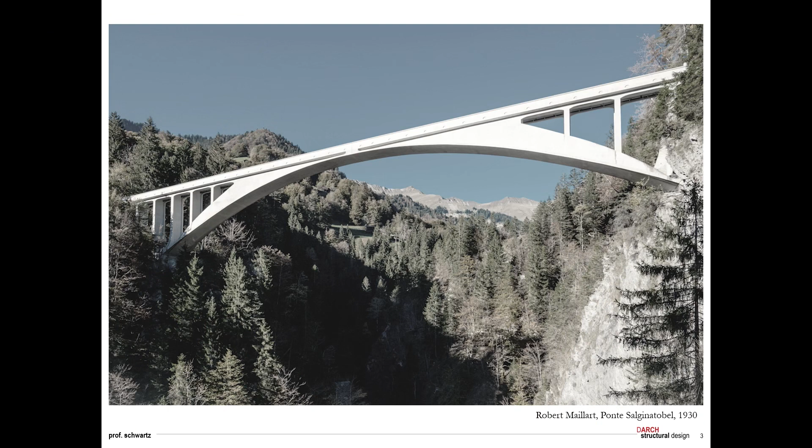If you look at this very well-known bridge of Robert Maillart, the Salginatobel Bridge, built 100 years ago, for sure Robert Maillart was not only looking at the classical ways of developing bridges. There is the quote that he was pre-designing bridges on old, already used letter envelopes, and I think this can be very nicely explained, probably you know this, by the fact that he was using graphic statics.

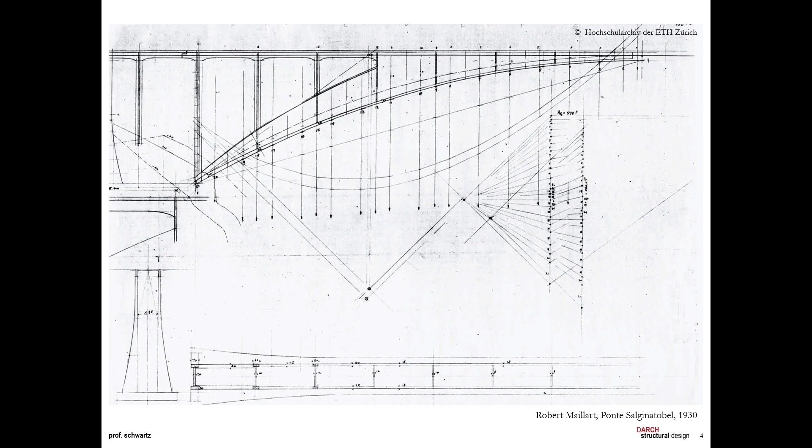And the reason is that he looked at the compression line in this arch, and if you have loads on the one side of the bridge, this line will go up, and if you have loads on the other side of the bridge, this line will go down. And the intention was to have this line at the interior of the material.

As long as you have the line at the interior of the material, there is bending. For sure there is bending, but this bending can be taken only by compression, and so you don't use a lot of reinforcement. That means he started with a very strong idea how the form should be developed in order to have a very efficient load-bearing behavior.

And what civil engineers are normally doing, they are waiting till the architect brings a system, a structure, and then they are trying to put a system, an engineering system in. They are making this structural analysis, and then the answer is it works, or very often it is not working. And then there is an iterative process, and at the end nobody knows where this iterative process will end and what about the efficiency of the project.

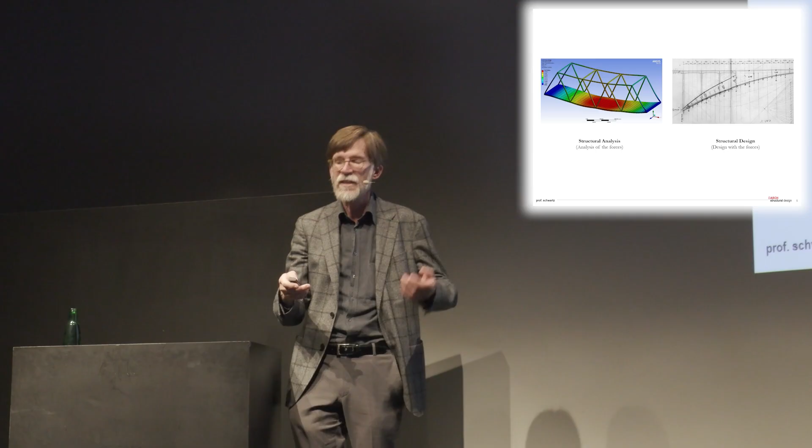And perhaps it's interesting, this question, does something work, was never asked between Christian Kerez and me. Never. The question was always, if we are doing this, what will be the consequences? And everything works, but the consequences can be heavy, and they can even be a no-go. But if we are speaking about the consequences, then we are able also to go on developing the structure.

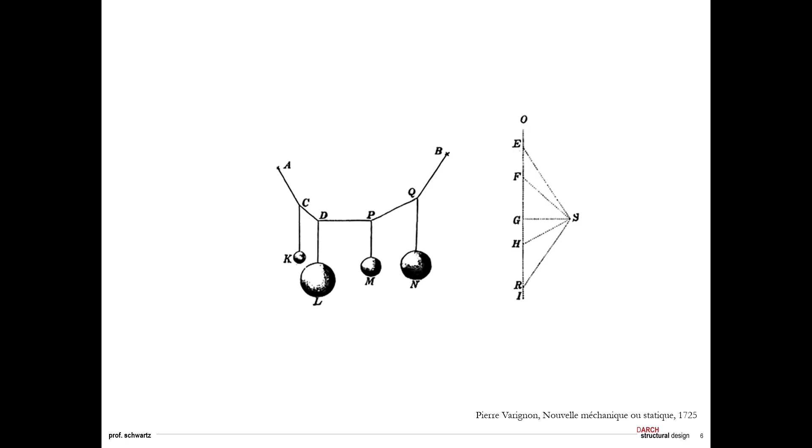And our model for articulating forces in space is fully based on graphic statics, a very old method that was already developed 300 years ago. As you see here, then Culmann in Switzerland, at ETH Zurich professor, was strongly pushing this method. And we tried, together with Aurelio Muttoni in Lausanne, to push this method in a way that we are able to model all possible systems by the internal forces.

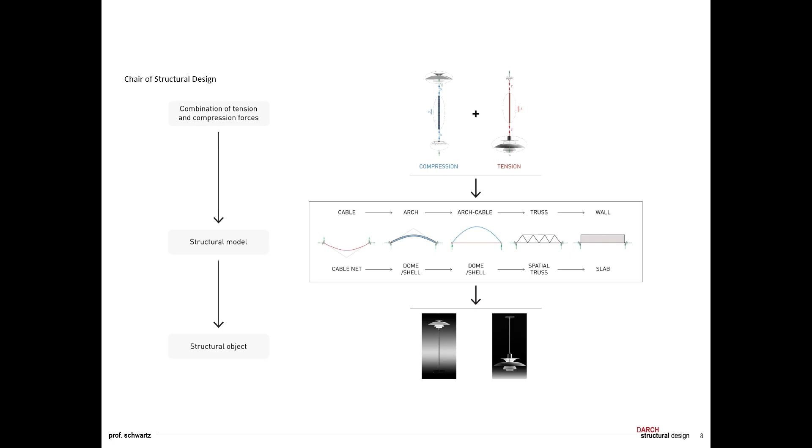Because, as I already mentioned, we are trying to start, as you see it on the top of this slide, with the internal forces, then trying to speak perhaps about how to articulate these internal forces, and then coming to the structure. And in order to do this, we developed a very strong methodology, starting, you see it here, with the cable going to the arch, then combining both cable and arch, then making a superposition of these arch cable systems, and so we come to the truss, and then at the end we are blowing up the struts of the truss, and we are coming to the beam.

And we are not starting, as civil engineers are often doing, with this beam, with slender lines, the statics with this classical statics, where already the most important dimension in this direction is missing, not speaking about the dimension in the third direction. Here you see once more this principle, and what we are doing, we are trying to explain, to teach this to architectural students in the first year course.

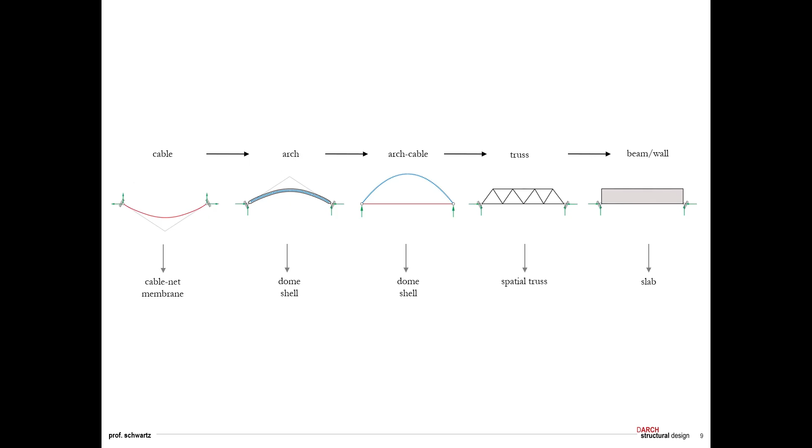That means cables, arch cable, truss, beam, and then at the same time going in the third direction. Cable net, dome shell, spatial truss, slab. That means at the end, they are able to go with graphic statics. I will quickly show how this works. And they are able to understand and even to articulate and even to calculate such systems. And all of them have the same level of complexity.

For civil engineers, shells are something very, very complicated, and you need computers. I don't know what. But for looking in this way at things, a shell is as simple as a beam or as a cable, and all these different systems have the same level of complexity. That means it's then also very easy for the students to use these different systems in a very playful way.

And I will also show that at the end the aim is to leave these typologies and no longer speaking about cables or shells, but only speaking about forces in space, and bringing these forces in equilibrium, and bringing these forces in relation to materials, bringing them in relation to structure in the sense also of architecture.

Simple principle leads to diverse structural behaviors. That's very important. Teaching, I already tried to mention what we are doing. We have then a second year course. We are going more in the direction of materials, and at the end, master studies, we have a lot of special lectures where they can play theoretically or experimentally or whatever with this methodology.

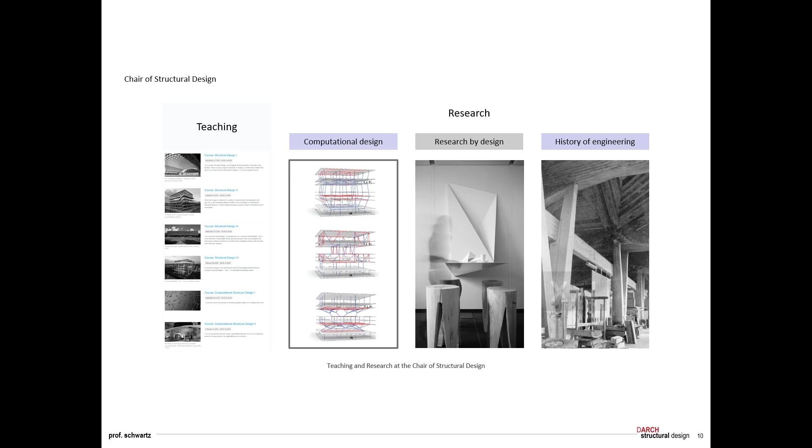In research, we were strongly doing research in direction of computational design, then research by design, and also history of engineering was a very important topic for us, because a lot of things in civil engineering history are forgotten and can be in a very nice way reflected also today, to be able to be much more efficient in developing such structures.

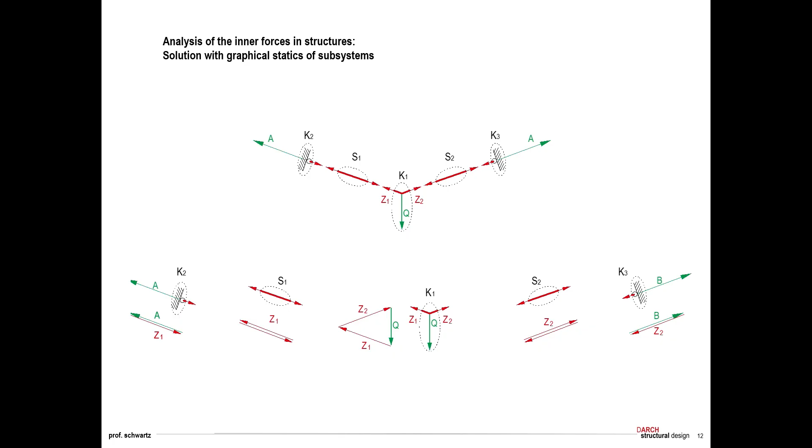Very shortly, this is something you understand. A man standing on this cable, and looking at this with graphic statics is easy. You only have to make equilibrium, for instance, in this node, and then at the end you will have something like a force triangle. You can put these force triangles for the different nodes together. Then you are coming to the force plan. You see it here on the right-hand side, this force plan and Cremona plan.

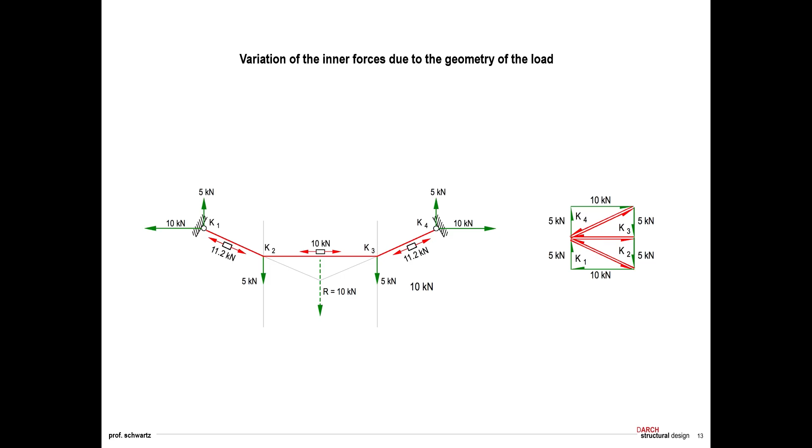And what's very interesting, if you are changing geometry of the system, immediately also the force plan changes, and you can immediately understand how you have to articulate your system in order to also be able to articulate the forces. That means you are not going by trial and error, but from the very beginning, you immediately see in the way of parametric thinking what happens if you are changing geometry. And this is also very important for architectural space, because proportions and all these things are governing elements in the concept phase.

You see here, playful with the students, we tried to also physically understand how forces work, and a very nice example here, the pavilion of Siza in Lisbon shows also in a very strong way how the method works. You don't only have this red line, red means tension in this tensile membrane, but we see also how the forces are going down in the towers. This blue line is leaving the tower. Then you need stirrups to put it back. You see how then the force interplay is going on.

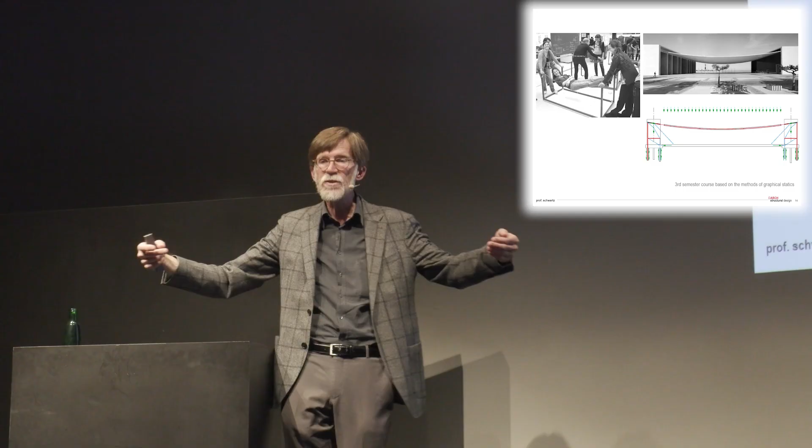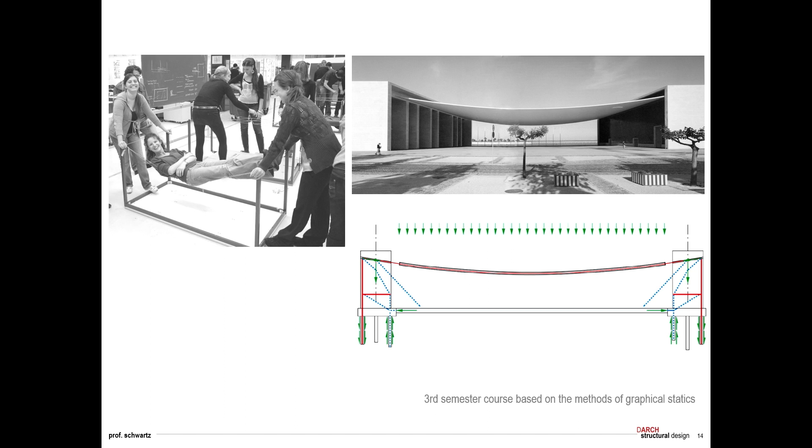You see how these forces are going in the ground with these piles, and you see also that you need this horizontal slab on the bottom to close the overall system in a very simple way, and you can immediately understand if you are changing geometry what will happen with the forces, and so it's much easier to articulate the whole system. We are not speaking about bending, we are speaking about this arch cable system, as you see here. Easily to understand. This can be an internal or an external system.

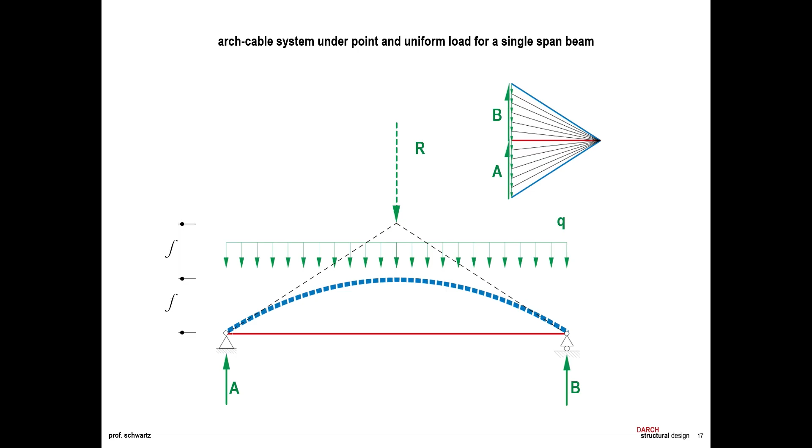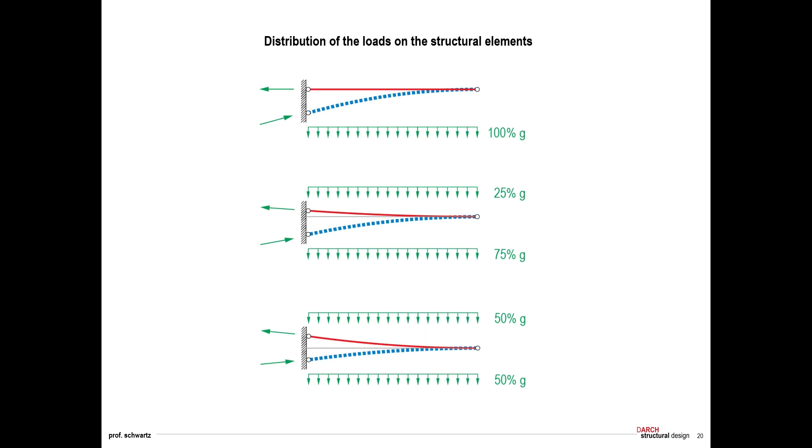Also here you see on the one hand the force plan, and on the other hand you see the system itself. Then you can do the same thing for cantilevering elements as it is used here. You can change geometry from the point of view of curvature of the compression element and the tensile element, and you can play also with the rise, and so you have all the parameters from the very beginning under control. You need to develop such a system that is really corresponding to a form that is efficient also in the sense of statics.

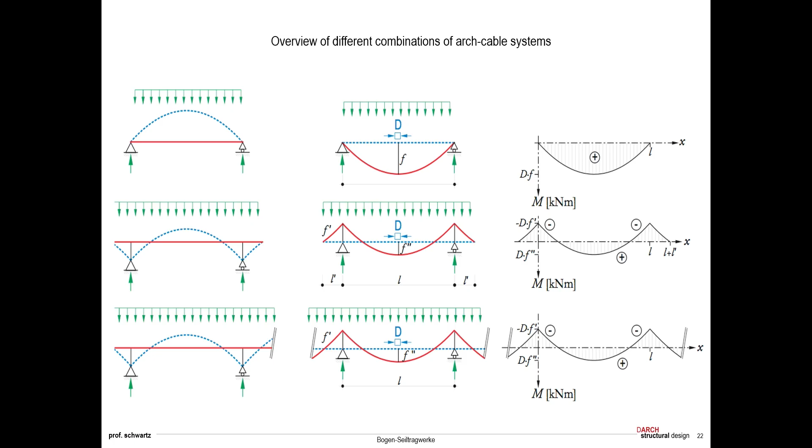Eiffel Tower is a nice example. This was already done by Maurice Koechlin in the same way, also with graphic statics. He developed the form, or you see here beams, or also beams with cantilevers or continuous beams. And what we are developing there is very similar to the representation of bending moments, but bending moments are something very abstract and never showing something about geometry, and never showing something directly about the internal forces. It's bending. We don't like bending, shear, torsion and confusion. We like much more compression and tension, and are trying to reduce everything to these elements.

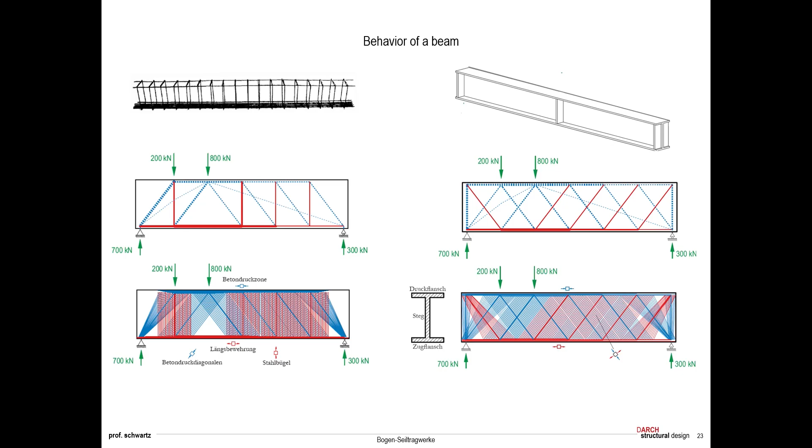You can also do this with stress fields in the sense of theory of plasticity, lower bound theorem of theory of plasticity. Left-hand side a concrete beam, right-hand side a steel beam. You see you have similar trusses at the inside, you have similar stress fields, but they are related to the material. But the principle is the same, independently if you're going with timber, with concrete, with reinforced concrete, with pre-stressed concrete, with steel, with synthetic materials. The principle is always the same. We already developed a book in 1996 together with Aurelio Muttoni and Bruno Thürlimann, who was my PhD supervisor, on stress fields in reinforced concrete.

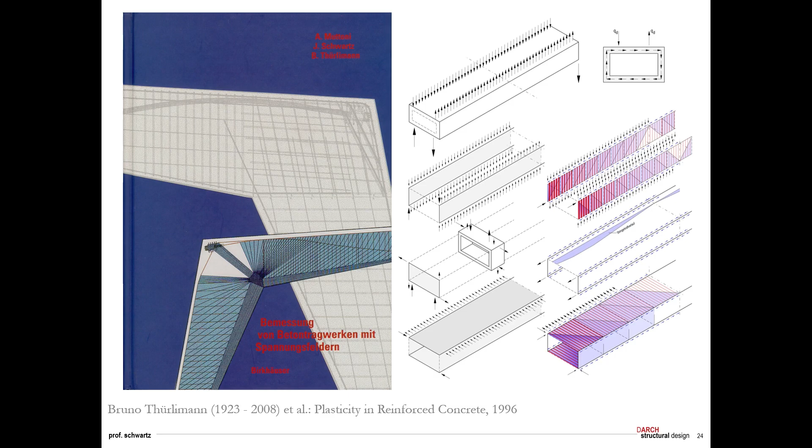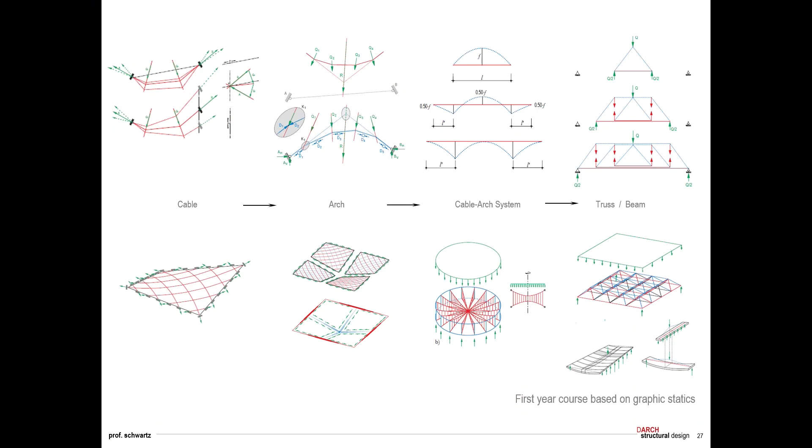And the whole thing, as I already mentioned shortly, is based on the lower bound theorem of theory of plasticity. We are not doing something that is approximative. These are systems based on a very strong theoretical background, because we always have equilibrium, and that's the very most important aspect, and that's not always the case for a lot of works that are produced in a lot of civil engineering projects. Continuous force flow in space, that's very important.

Also the third direction, and I wanted quickly to show this in order to make it perhaps a little bit easier understandable when I will now speak about these selected projects, and also a little bit about the development of the projects. I think this is much more interesting than showing the final project. Some of the projects you will know, but what you will probably not know are a lot of anecdotes during the developing process, and I think these are not anecdotes, but this is how projects are developed.

And for all of these projects, what's nice at the end, it's no longer possible to differentiate what was brought in by the architect and what was brought in from the civil engineer. I think this is very nice, that at the end you can no longer split this, and we don't even remember how this process was really running. We only remember a lot of anecdotes, but there is no continuity in the development for sure. You know this very well, projects you have developed by yourself.

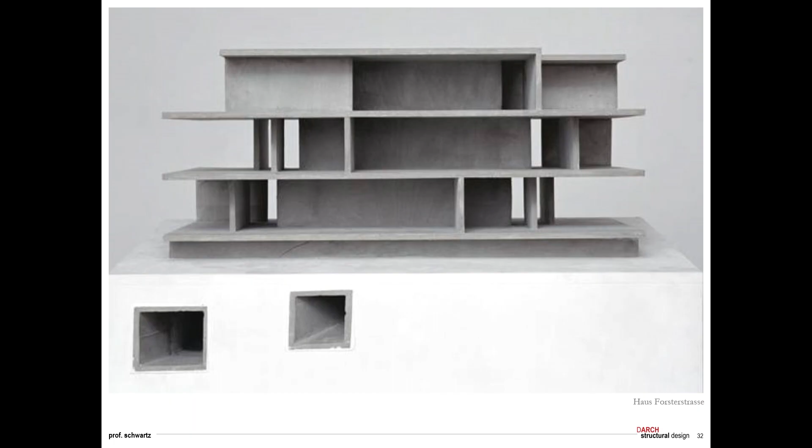And then for me it was sure that in order to produce something like this, the idea behind must be very, very simple. If the idea is not very simple from the point of view of civil engineering structural design, then we will immediately lose control. And then what we did at the end, we developed a rule that a wall has to be supported at least at one point. This seems perhaps a little bit strange. If you are telling somebody you have a wall, you put it on one point, and the point must be in the middle. But no, this was for me not the point. It can also be supported by this point.

Why? For sure, because this wall is not alone. This wall has colleagues in the building. It has a slab on the top, it has a slab on the bottom. And now, in order to rotate around this point, it has to be detached from the 2 slabs. That means the forces, tensile force here and the compression force here, are enabling this wall to stand even if it's only supported by one point, because it's at the interior of this integral system.

But that means that on the other side somewhere there must be a counterbalancing wall, and you see very nicely these 2 walls. On the one hand you have this one, which for sure is only supported on this point, and then on the right hand side you have another wall, and this wall is only supported on one point. And so it's possible, by looking at this integrally in 3 dimensions, that you will be able, if everything is in equilibrium, to bring at the end these forces down through the middle core of the building.

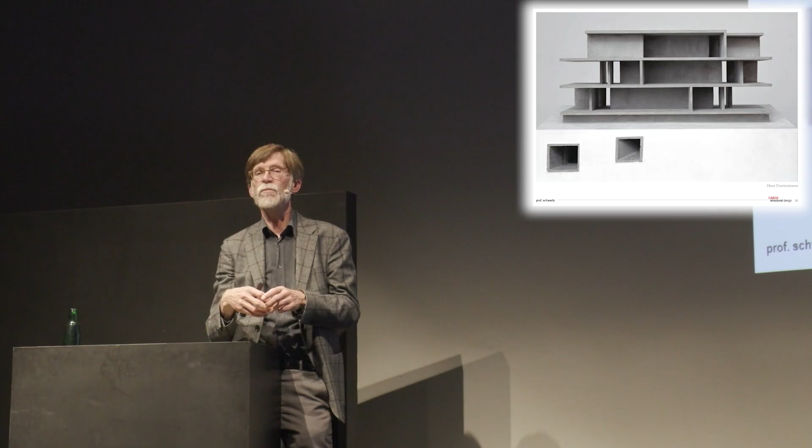What was the benefit? We had a very, very small plot, very small dimensions to build the building, and it was very important to build spaces that seemed to be bigger than they are in reality. And for this it was very important to build spaces where you don't see the columns.

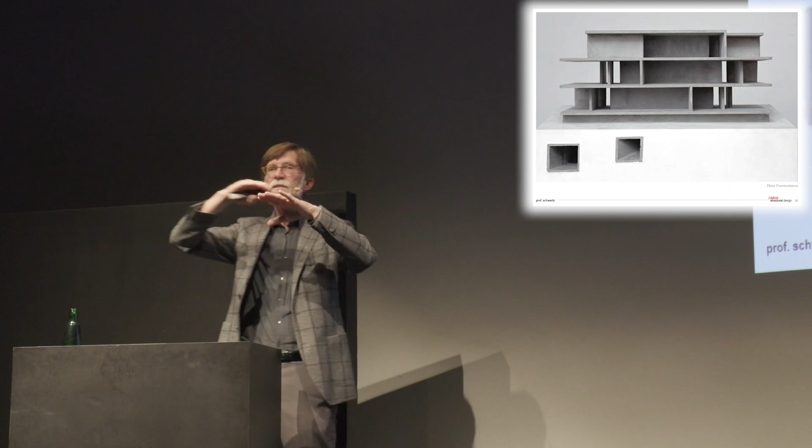Coming back to this example, if you are looking, for instance, here, this slab at this point is hanging on the wall on the top. And if you are in this room, you cannot understand how this span or this cantilevering is possible if you don't know that the slab is hanging on a wall 1 story higher than you are standing. On the other hand, also the total opening to the outside and bringing a landscape in for sure is also increasing this effect of giving the feeling that spaces are bigger than they are in reality.

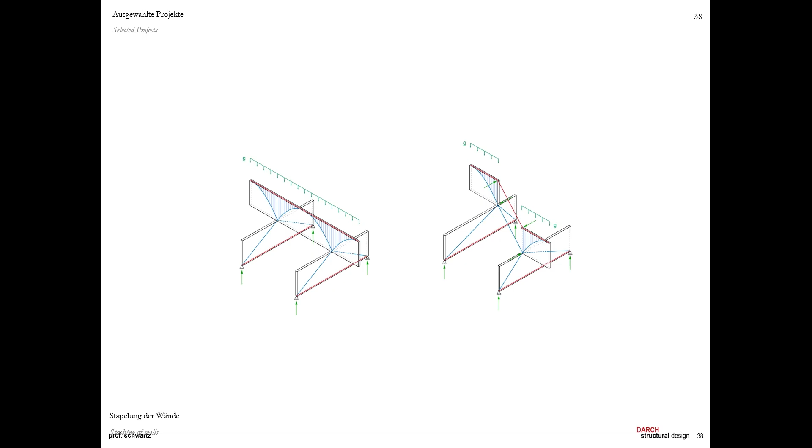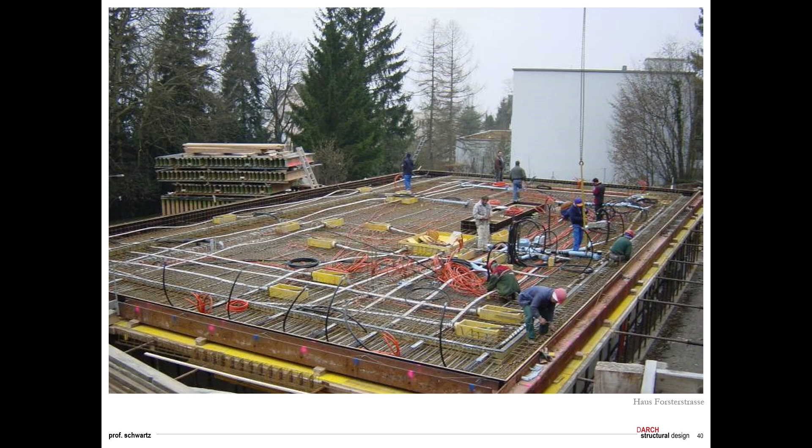For the slabs, we used pre-stressing, very sophisticated, in order to have this very nice concrete surface on the bottom of the slabs. We also like a little bit more complicated handling on site, and this worked very well in the sense of construction. The parking under this slab you see in the slide is without any columns, because we have these 4 walls that are used a little bit like a windmill, and by putting pre-stressing cables in, the deviation forces are replacing these columns, and so it was possible to build this 25 to 15 meters slab, this whole building without any column in the parking garage.

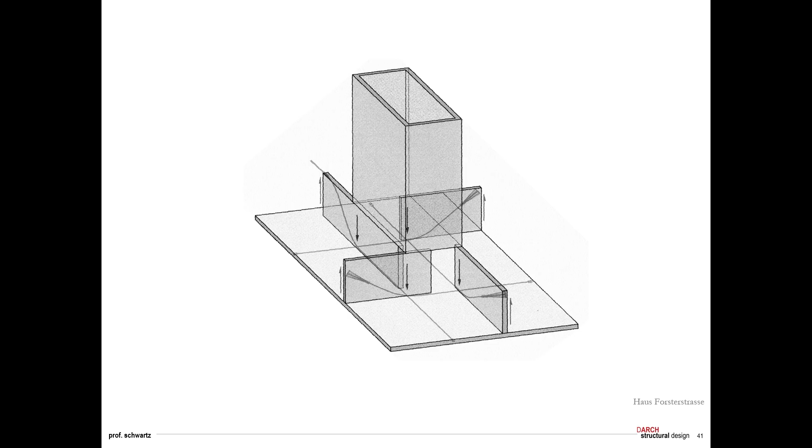Then the Leutschenbach School, you know it very well. Also here some ideas only. This was the first phase, because the competition was in 2 phases. In the first phase there were 2 teams that could work on it. In the first phase we had a system without balconies.

Then in the second phase we put these balconies in. They are very important for fire escape, so that it was possible to have very big interior spaces and to open everything at the inside by making the escape via these balconies.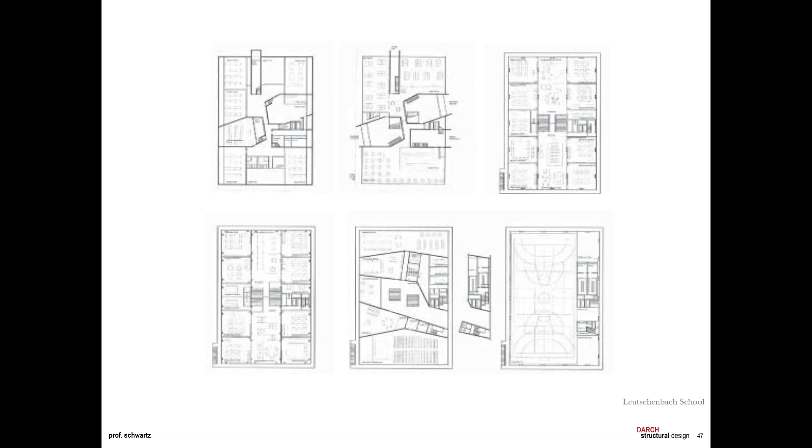And only then in the last phase of the competition, we changed to a total system with steel trusses for the overall load-bearing structure. It's a mixed structure with concrete slabs, but all the wall elements as trusses.

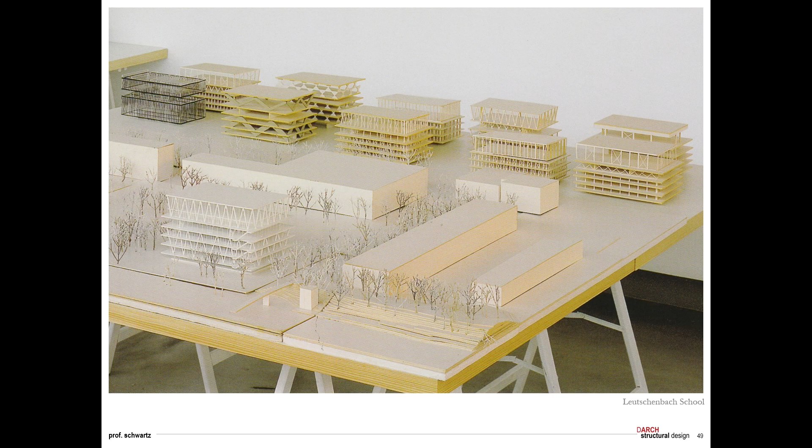And here you see models of different options we tried to develop in the sense of statics, in the sense of architecture, and we were in a very playful way trying to find out what could be the optimum in the sense of structure and also in the sense of architecture. And then, yes, the process went on.

Here you see something that is already very close to the final version, but you see on the ground floor we have truss walls, and then there was the question, are these truss walls really needed? And what could be the minimum? What are the consequences if we are trying to reduce these trusses as much as possible? And the answer was, from our side, the consequences are that it's even better.

And so we went one step further and put the whole building on 6 tripods. And also here, the reason is rather easy. You have all the loads on these tripods. If you now have horizontal loads, for instance, earthquake loads, then you have the whole vertical forces going through these tripods. And if you are bringing these lateral forces, they will stay in the tripods. On the one side they will be increased, on the other side they will be decreased.

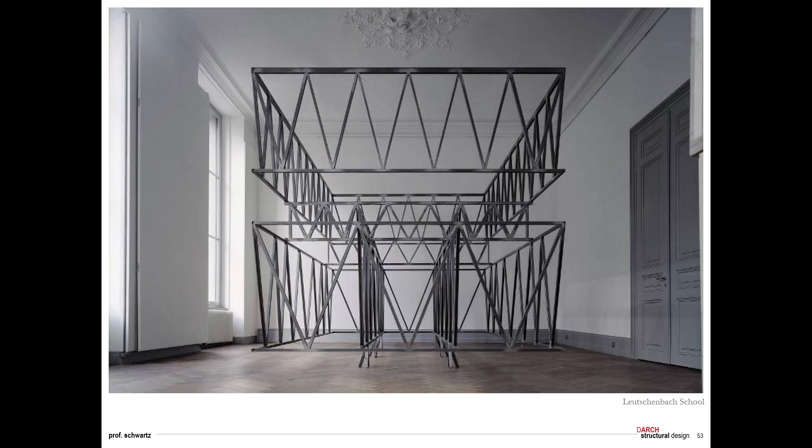Here you see a model we built 1 to 10 for a big exposition once of this steel structure. On the top we have the gymnastic hall only lying on 4 points. Then we have these 2 transverse trusses, and these 2 transverse trusses are bringing the forces down through these middle trusses to the tripods, and the outer facades of the 3 stories of the school building are also hanging on these transverse girders here on the 4th floor of the building.

The open floors on the ground floor and this 4th floor are more public: aula, library, mensa, and so on. And the middle tracts are more private, 3 levels of classrooms in the lower box, and as I already mentioned, the gymnastic hall on the top box.

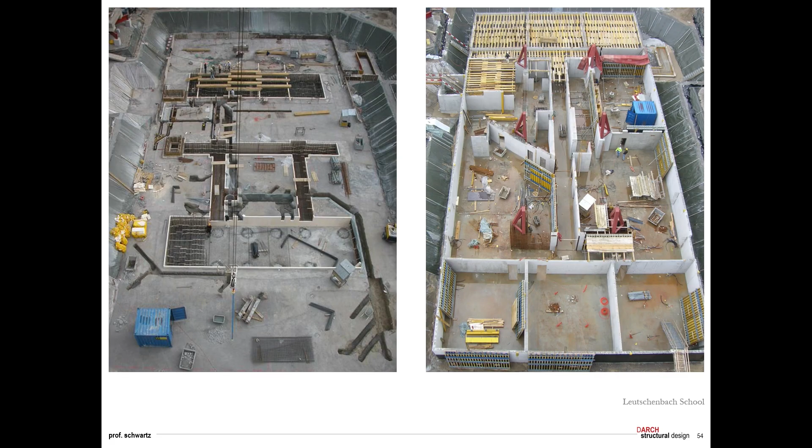And also here, for sure, when we put these trusses at the outside, we had a lot of problems with building physics we had to solve, and we solved this by a most efficient and very simple detailing we developed by ourselves, but I think this would lead much too far to explain all these details here.

You see a little bit the building process, foundation, then you see the situation when we built tripods on the right-hand side. Here you see how we assembled these main trusses, these two transverse trusses having to take enormous loads, and then at the end some plans of the whole system.

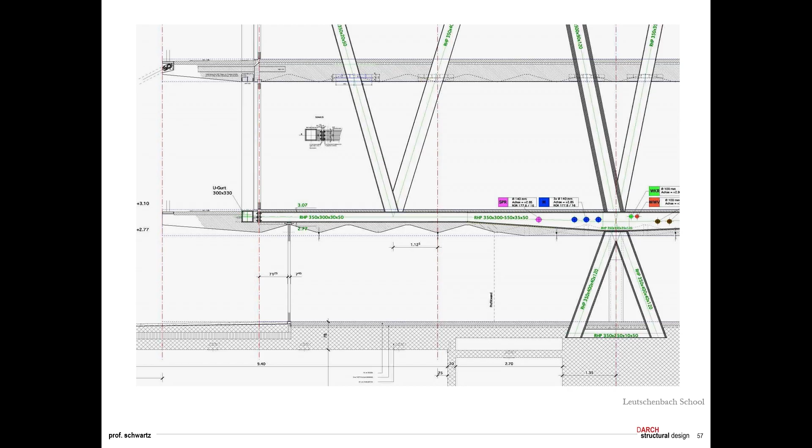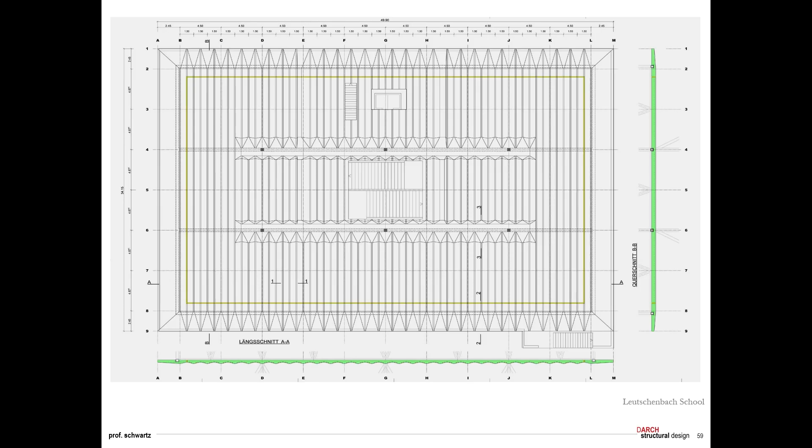You see also this detailing with this very big cantilevering element there, only understandable also here. Same principle as for the house in Forsterstrasse, if you understand that the slab is at the end hanging on this truss. For the planning, it was a lot of work to do in order to have all these openings at the right location from the very beginning, and so on and so on. You can imagine what this means, a lot of detailed planning was necessary, but at the end the process on site was not so difficult.

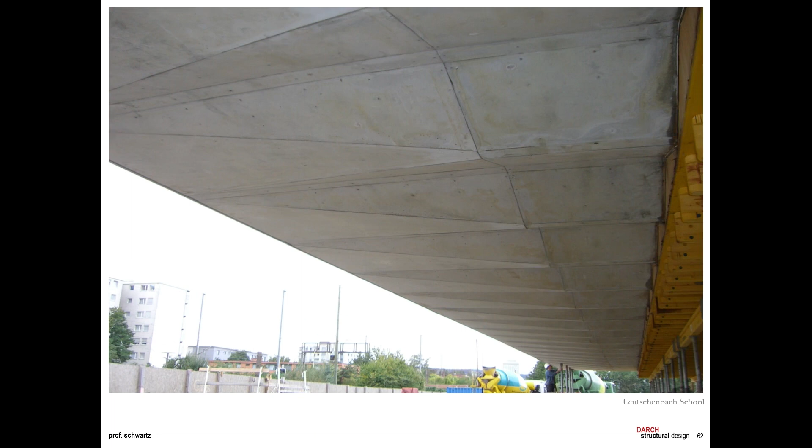The slabs also here, formwork of the slabs, then you see how this was developed. You see then when scaffolding was taken away, this is always a very difficult moment for the civil engineer, but at the end we were very happy to be able to bring this building to a good end. This is the edge of a classroom.

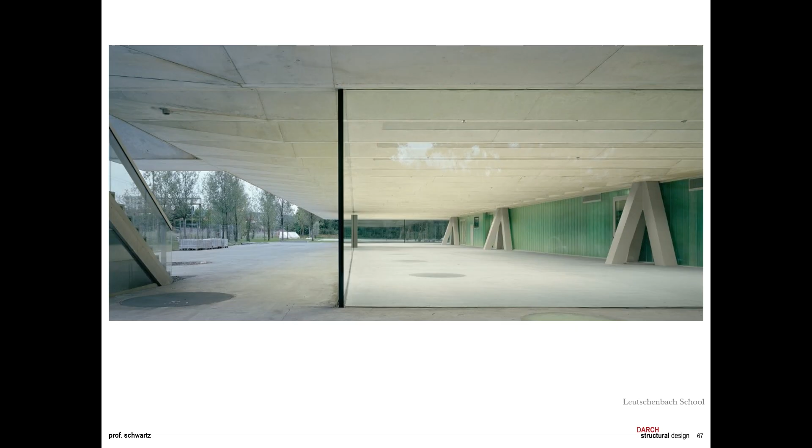And here also you see this very strong cantilevering of 13 meters on the bottom, and these bases are very strong, and it was also here possible to put glass in without any frames. This needed a reduction of the height of the building, and this was also fitting to the architectural idea of connecting outside and inside, but also to making this very high load of the building, this flying load, a little bit more dramatic.

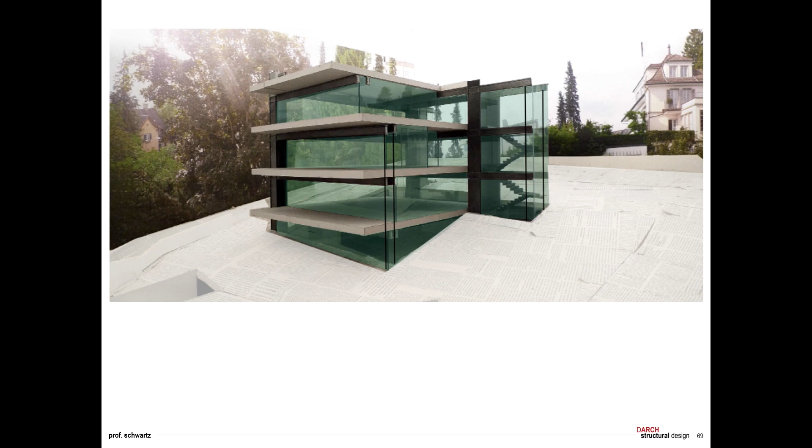House with the missing column, it's a Haus Müller. It's a Haus Müller in Zurich, not a Haus Müller in Prague, but nevertheless, it's also an interesting structure, but not comparable to the school of Leutschenbach. You see, it's a building with 3 levels of flats, only 3 flats in the building itself.

And the idea was to go with a windmill-like system, starting with 3 cores. One core is here, then another core is on this side here, you see it with the elevator, and the last core is on the bottom here with installation tubes. Staircase core, core with the elevator, and the core with the tubes. And then we have these cantilevering elements going out from this core, and they are connected. Only the last one is lost. For the last one there is no connection at all.

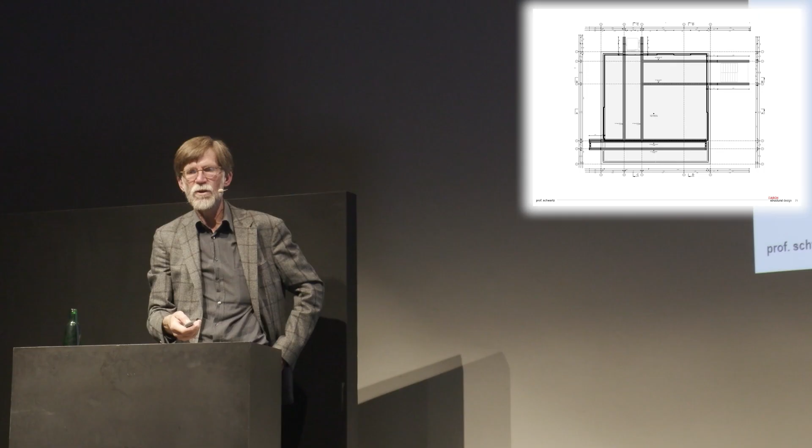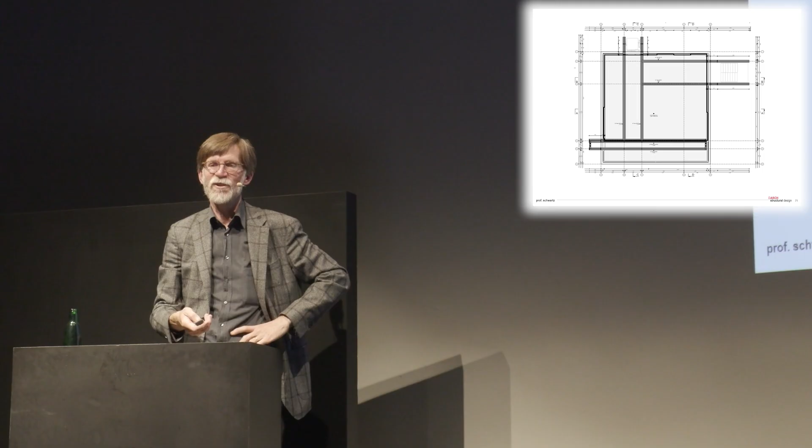And in order to bring this one under control, we built it a little bit like a curved element, like a banana, and then with cables we brought it into the horizontal position during the building process, and so it was possible to use these cables as columns in the further process, because the reduction of a tensile force in the cable is the same as the increase of a compression force in a compression column. This is perhaps a little bit tricky, but that was the way we solved it.

And then you see also here, this is also a mixed structure. This was an interesting building phase with this structure in space without any reference element. It was not so easy for the contractor to build, but he did it very well. And then in the second phase, the slabs were put in.

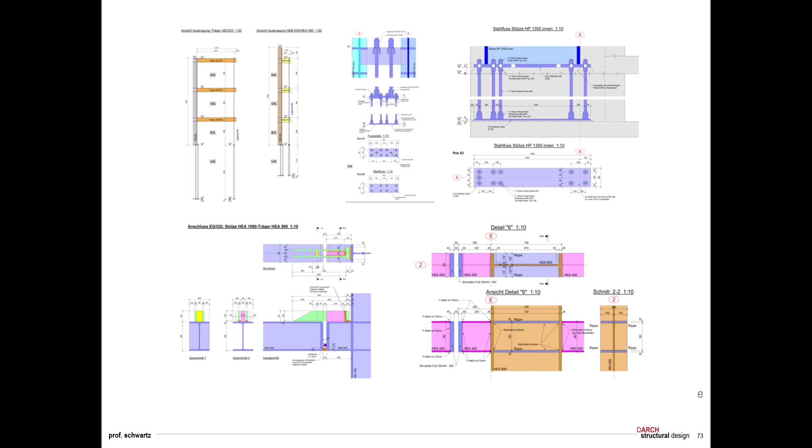Here we had a lot of problems with these connections, where we also had requirements on fire resistance, and all these details we tried to develop by ourselves, and then at the end to test them also in a laboratory. But also this leads much too far to explain it here in detail.

Now some projects that are a little bit more recent. Incidental space for the Biennale in Venice. That was more a question of how to develop spaces that are a little bit strange, a little bit new, a little bit playing with the perception of spaces. And the next project I will show goes in a similar direction, but it's something totally different. But the idea is more or less the same.

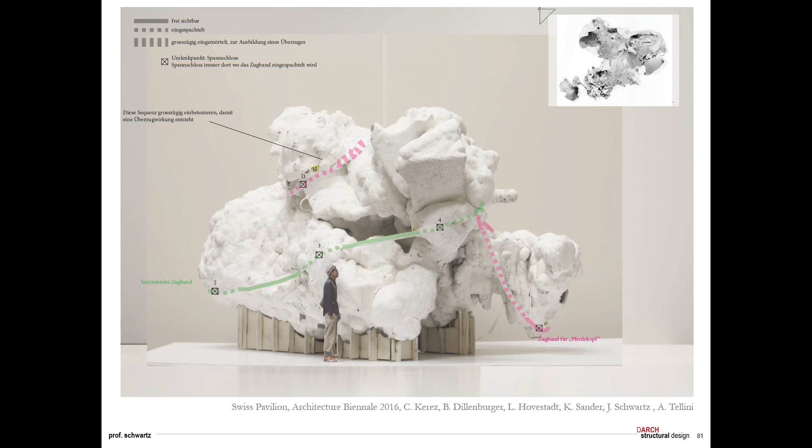And then the question was how to build it. What could be the thickness of such a structure? My answer was something around 3 centimeters. Okay, then let's choose 4 centimeters on the bottom part, 2 centimeters in the top as the thickness of this shell-like structure, and let's try to build it. And then we found a shotcrete specialist who was able to help us to build it.

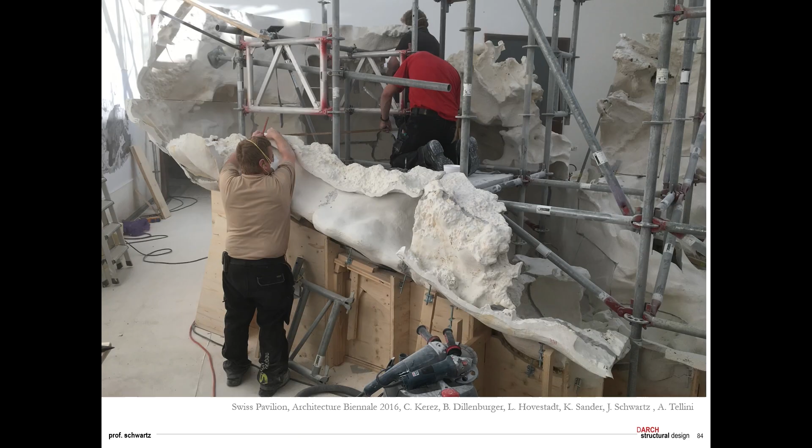And then at the end a shotcrete layer between 2 and 4 centimeters was put on it, and at the end all these different elements were transported to Venice, more or less 200 elements, and then they were assembled on site in the Swiss pavilion, as you see here,

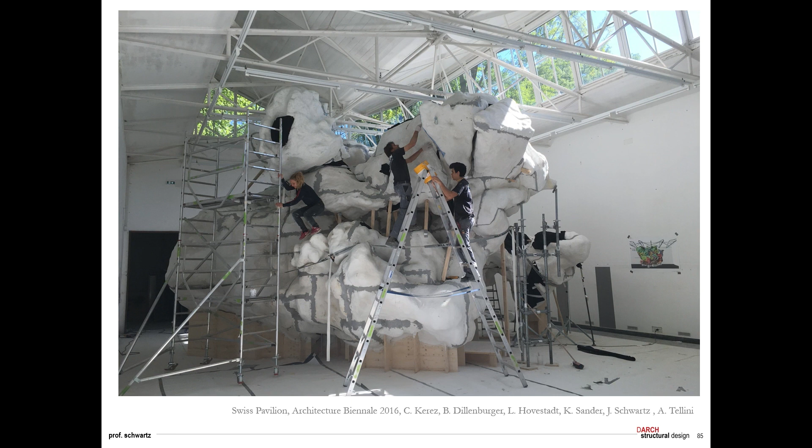and they were glued by an epoxy glue. Here you see a lot of people, students, building this 5-meter high building, and at the end we had to put this entrance in so that it was possible to enter. And here you see some cosmetics at the end. This was during the inauguration of the exposition.

Christian Kerez together with the Swiss minister, and they were sitting inside and were trying to understand what was going on in their perception by being inside this structure. Here a last picture from the outside, and the entrance is somewhere here. That means you can imagine a little bit the proportions as we have seen before, 5 meters high and 7 meters of length. So far for this project.

Now I'm coming to the pavilion for the Kingdom of Bahrain for Expo 2020 in Dubai. And as I already mentioned, the idea behind it is more or less the same, but the product is for sure totally different. But it's also about perception of space. And you see here first pictures of these buildings. This is a floor plan, 25 by 25 meters.

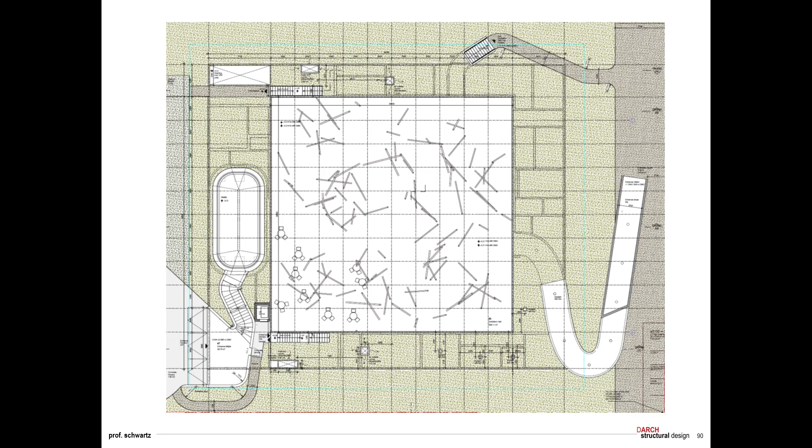We are more or less in the dimension of the school building of Leutschenbach. And here you see the rooms that are placed around, everything underground, and what is visible on the outside is only this cube. And not to forget, on the left-hand side, a small building for the King of Bahrain. He had special possibilities to enter the exposition, but the main building is this cube coming out of the ground, and nevertheless 3 or 4 meters also underground.

And this was what Christian Kerez showed me the first time. He tried to develop it with other engineers because he had the feeling that it's very simple, only one load-bearing element, a column. Multiple of these columns should be easy to manage, but they had problems. They were working on the project for more or less half a year, and the engineers always told him there is a column missing, and then they put an additional column in. And then they found out there is another column missing. And this game went on, and at the end it was not possible to come to a good conclusion.

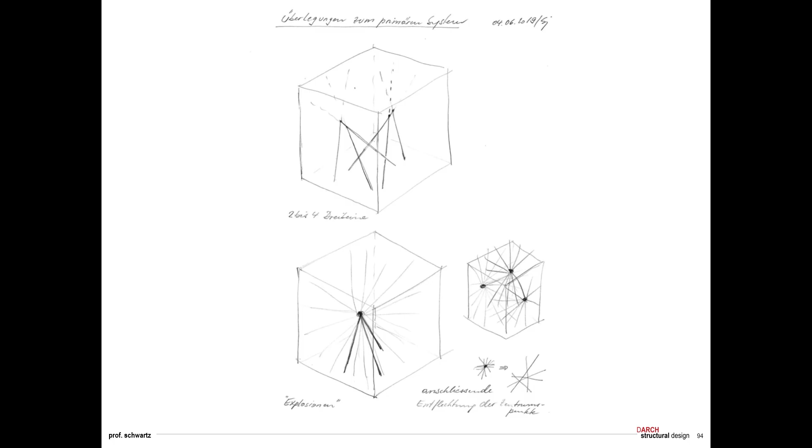And then we are trying to connect 3 or 4 or 5 of these tripods, and then we are looking what happens. We are telling the system, you will not buckle, but at the end we will try to solve the buckling problem; we will eliminate the buckling problem ideally, and then we are looking what's the minimal dimension for these columns, because that was also a very big topic for the engineers.

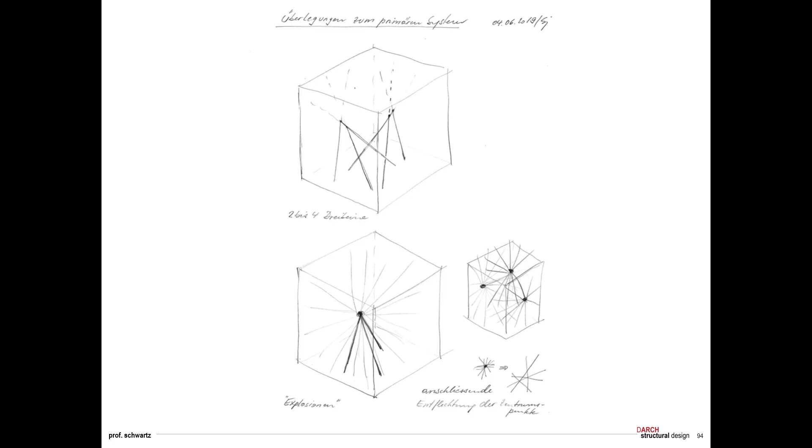It would be nice to have columns like this, 25 meters of length, but in the idea of perception of this space, it would perhaps be nice to have columns of only 15 centimeters, 25 meters long. And then we found out, no, not 15, 10 or 12 is enough if they will not buckle. But in order to take the structure of the facade, this will be enough.

And then what we did, you see it in this slide, we produced families of columns. This is now a section through these columns, and now you will see these columns growing. The red ones are the tripods connected by these horizontal lines.

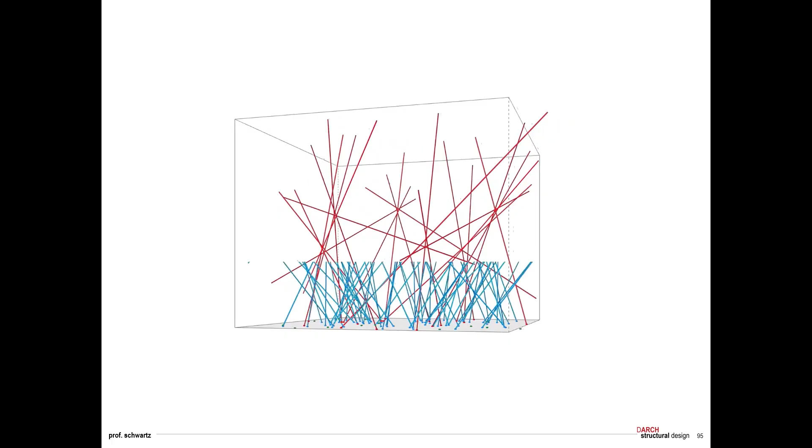And these tripods, they are taking all the loads. And the other ones, they are used to stabilize the red ones. And the green ones, the third hierarchy, the last category, is used to have the last elements you need to hold the facade.

And so we had this rule, and I think this is very important, and perhaps you could feel in all the stories I told to you for the other projects, this question of having rules is very, very important. And I fixed the rule to put in these tripods and to have these connections. And Christian Kerez liked very much these rules.

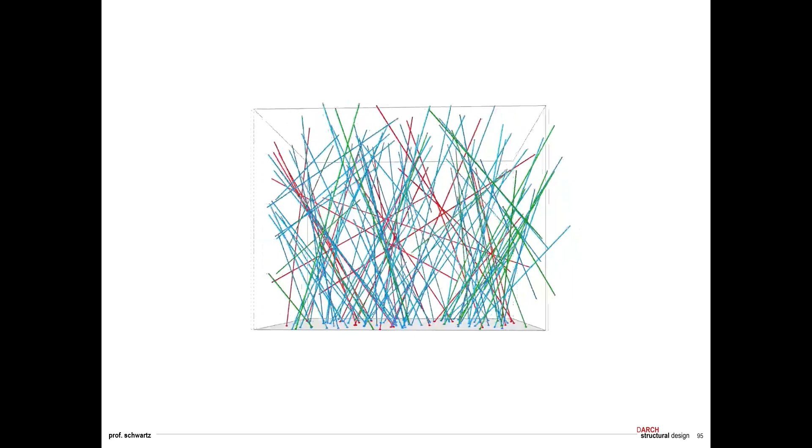Another rule was that we should avoid horizontal and vertical elements, because then you already have the feeling it's a column, it's a beam. It should not be beams, it should all be a Mikado-like column system. And so we avoided angles between 0 and 15 degrees and angles between 80 and 90 degrees and so on. And then at the end, we had not a lot of options.

They produced hundreds of models for sure, because they are very quickly produced. And at the beginning, they tried to bring it from an architectural point to the optimum, to a very strong differentiation of density and so on in this forest. And they tried it out, and they were never very satisfied. It's a sculpture, and yes, they were never satisfied by the final solution they had.

And what was then very nice for me, that at the end Christian Kerez told me what we developed now with these very simple rules is much stronger than everything we developed before, let's say by intuition.

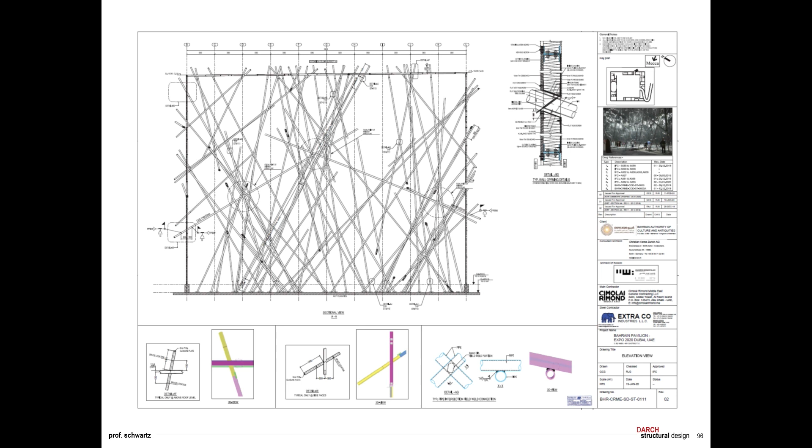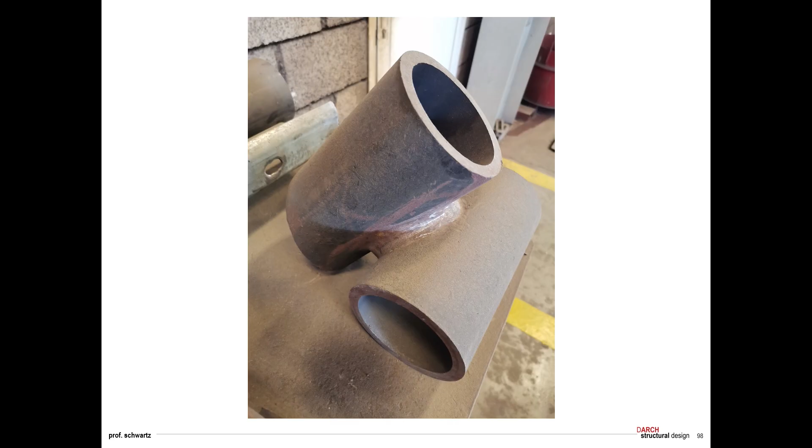And what's also interesting here, then the idea, instead of making all the columns with a diameter of 12 centimeters, these columns of the tripod, we will do them a little bit thicker. We will do them 14 centimeters. And this was not very easy to recognize, and only a few people recognize there is this differentiation, but also this subtle variation we already did with the struts in the school of Leutschenbach was a very interesting aspect. We polished the steel and put a transparent color on it.

Here you see the finalized structure. And another question was, what about the windows? And for the windows, a little bit relating to these Arabian window-like systems, the idea was to develop windows like slats, and having the columns perforating these slats, and then at the end you don't see where the columns are ending. They are penetrating the facade through these voids, and on the other hand you have the light coming in, very nicely filtered

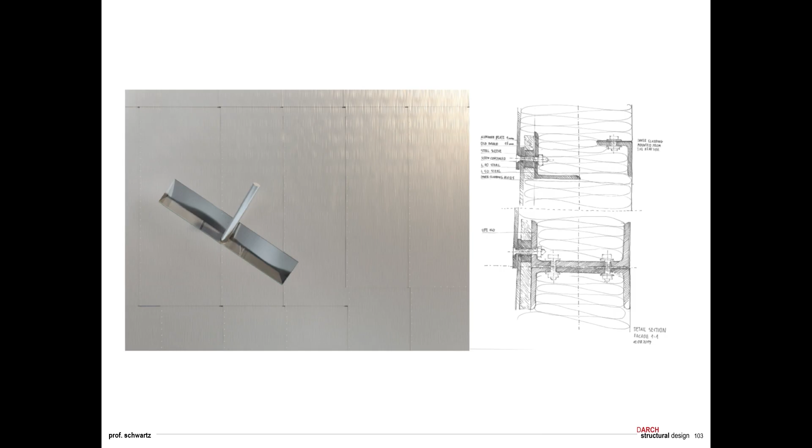with this yellow sand that was lying at the end a little bit on the structure, bringing a very nice light at the interior of the structure. Also the facade was a development we did with a lot of engagement. You see how this was at the end developed. You see here the idea I already mentioned. Here prototypes we did in order to look at the feasibility.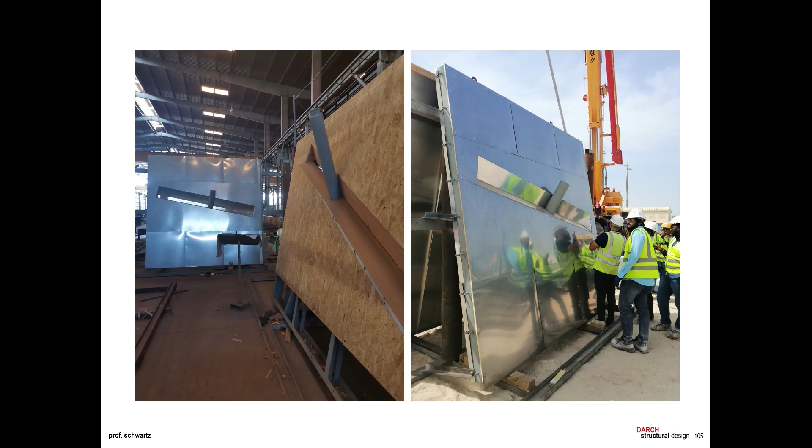Then the outer surface, it was very important for Christian to have a little bit of structure in this surface. Not to build it totally plain, but to have a little bit of structure in it. And this was then differentiated between the core itself and the regions where the windows are. If you look a little bit more in detail, there is much more precision, and so there is this variation on the overall surface. Here, see a little bit the effect of the space.

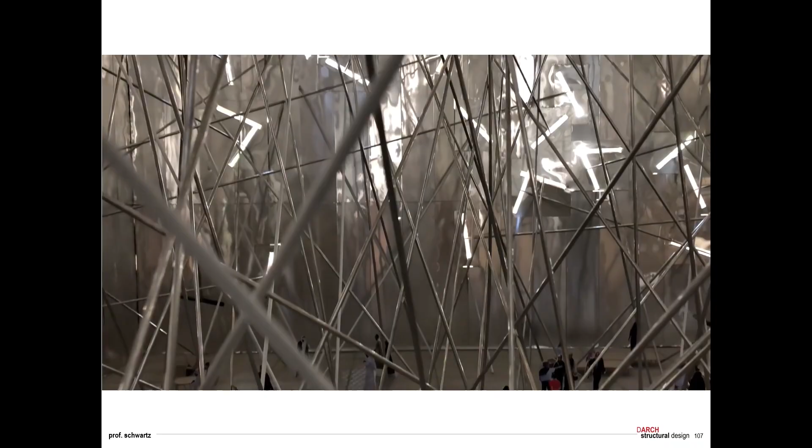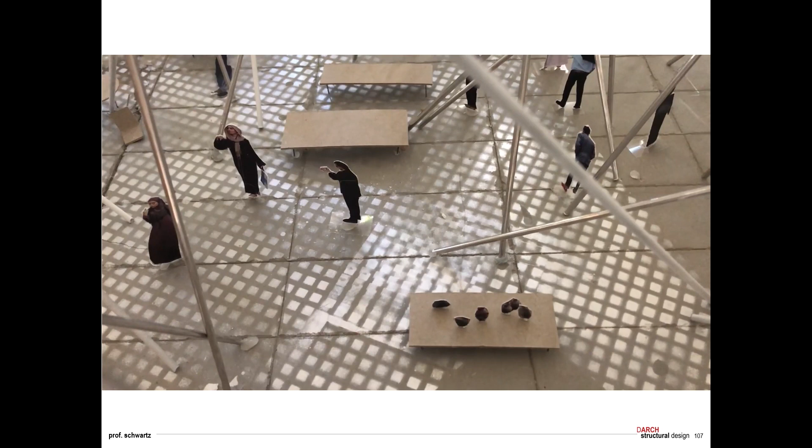There was this exposition on the floor, and also playing with this density. At the end, it was very interesting to see that the perception of this space, even working for months and years on it as a planning team, was once more totally different. It was much more open. It was something different than everybody had imagined during the process.

Now, the last, this is only for some few minutes, and it's a movie about this China pedestrian bridge. We won a competition nearly 2 years ago as an invited team in Nanjing. Now we are in the planning phase. Nobody knows if this bridge will be built and who will build it, but nevertheless, we are still involved in the planning phase. And also here we tried to make something that is a little bit out of what is normally done by thinking of a pedestrian bridge.

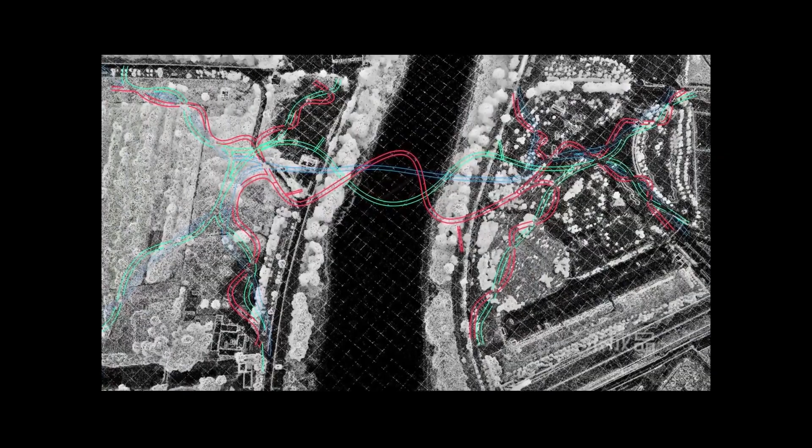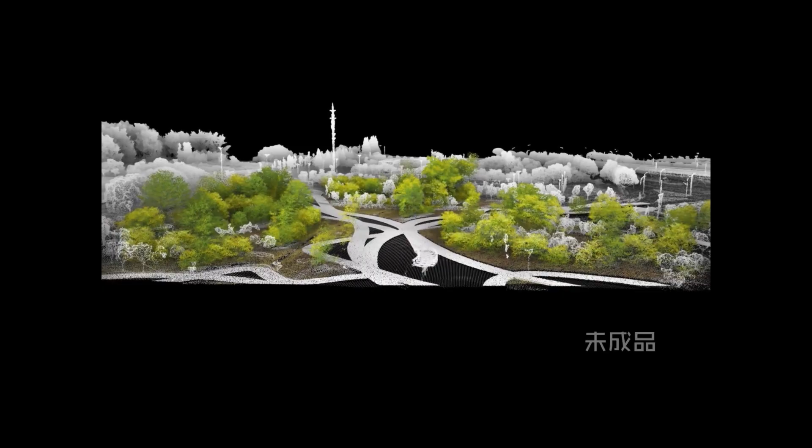Nanjing, you see it here. It's a bridge over this river. On both sides there is a park, and in these parks there are these paths you see, very serpentine-like. And now we tried to go on with these paths in the park and to bring these paths into space. That means something like paths in a park, but not grass at the exterior, but air.

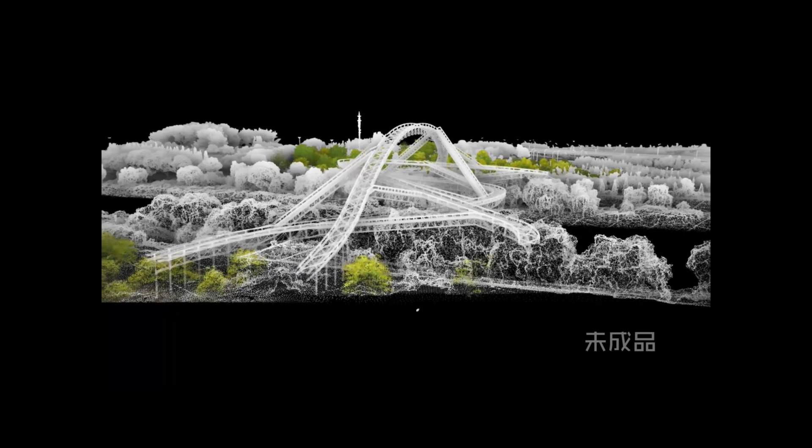Nothing but air at the exterior, and then at the end it was the question how to develop such a form. Then we decided to produce more bridges in parallel, 2, 3, 4, 5, and at the end we decided for 3. You see a little bit the context. Perhaps you know Nanjing, this town that is in a very strong development, also with a nice university where they are strongly interested in architecture and space, a lot of technology. This bridge by Zaha Hadid, not far away.

Then the question of the park, and the region there is named with the name of an old technique they have for painting, and we use this a little bit as a reference for the bridge design, and their different aspects are important. On the one hand, the verticality that was very important also in our project. Then for sure, the horizontality is always a topic in a bridge, but also how to go in the vertical direction, and this density. This density we also try to experience in the incidental space and also in the Bahrain project.

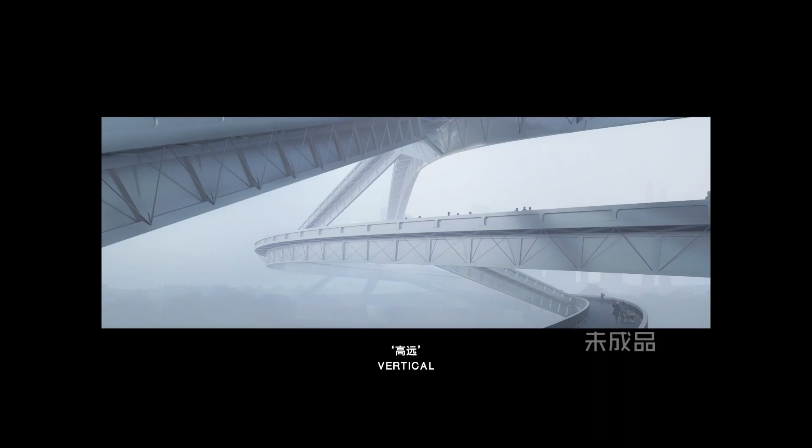And then what we did at the end, we did 3 lines of the bridge, and these lines are conducted in space and are connected by staircase elements. That means all the load-bearing elements are accessible. There are no pylons, there are no cables, elements that are only there to support the deck, but everything you see in this bridge is accessible, and you can go over all of these different elements. And the idea behind is to have something like a 3-dimensional arch cable system, as I tried to explain at the very beginning, something between a Vierendeel and a truss.

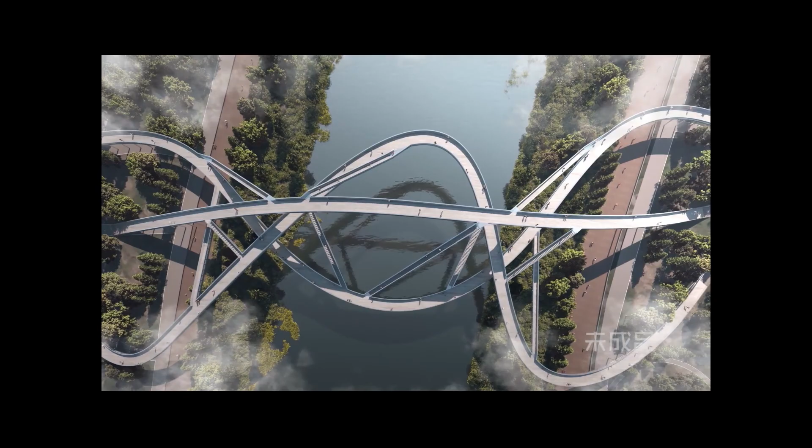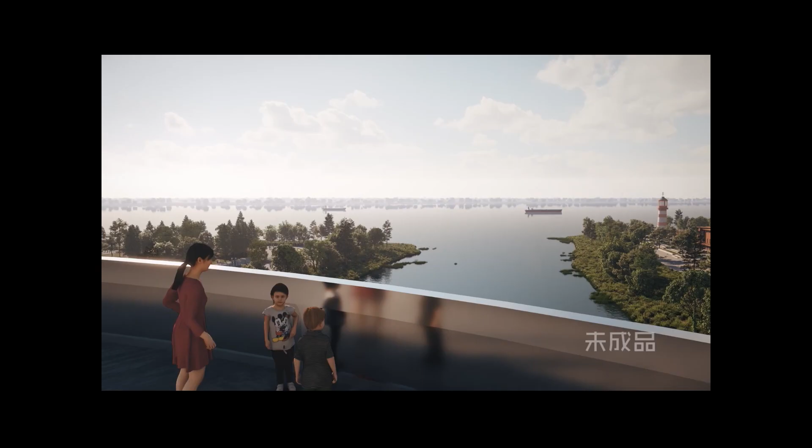And the idea was to produce a form finding with only compression and tension in the elements under dead loads, and bending only appearing if you have additional loads. That was the rule. And this rule was also very fruitful in the sense of how to articulate density, how to articulate the whole system, how to go with these curvatures, because that was very important for us, that when we are walking over this bridge, the view is changing continuously.

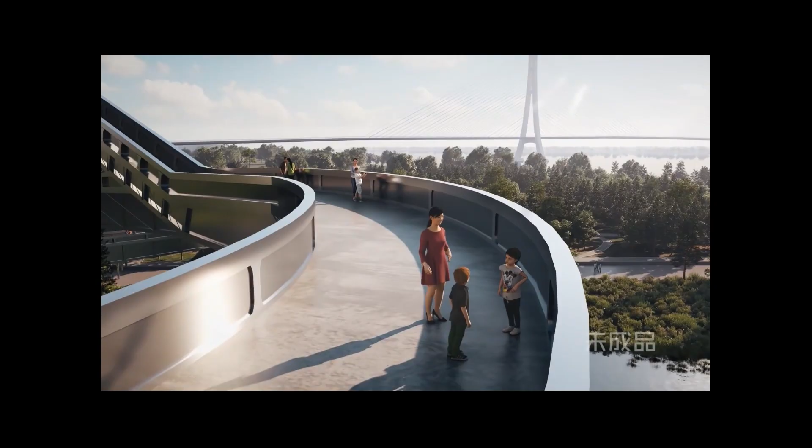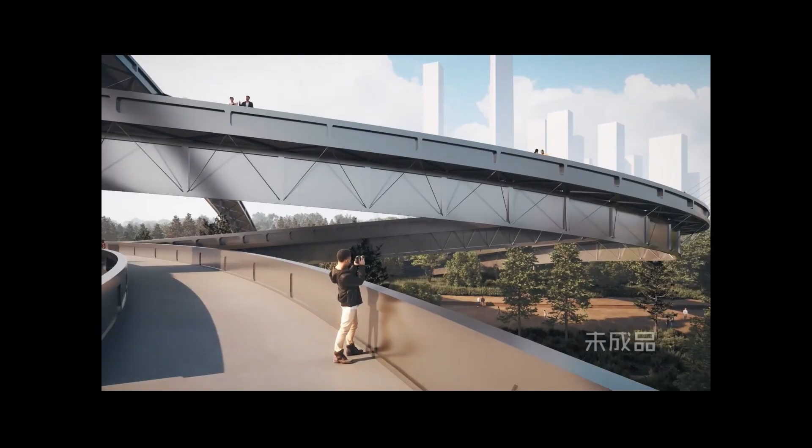You see it very nicely here. You can go on these different levels. You can even change the level if you want by passing the bridge from one level to the other one. And normally, if you are passing such a bridge, the view is more or less the same. You are changing position, but from the point of view of three-dimensionality, the view is more or less the same. And here we tried really to play with this integration of the whole system.

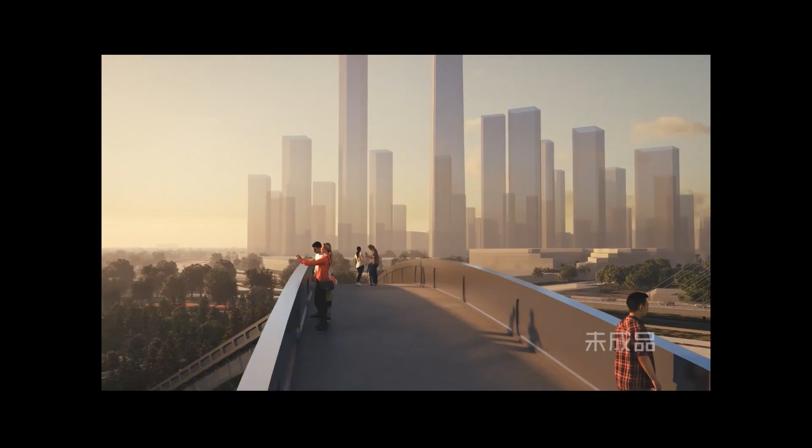The span is not yet totally fixed. It's something around 140 meters, but it's always a little bit changing depending on the boundary conditions they are bringing us from these different regulations, and these things are not yet totally defined, but we are now going on in the process, and it would be really nice to have the opportunity to build this bridge. But nothing is clear in our world. We live now in 2023, but we will see.

Even 60 years later, I think it's more valuable than even then. And we should reflect on this and really go on trying to bring these disciplines together, to really reconcile these disciplines and also the new disciplines that are now involved when we are developing projects nowadays.